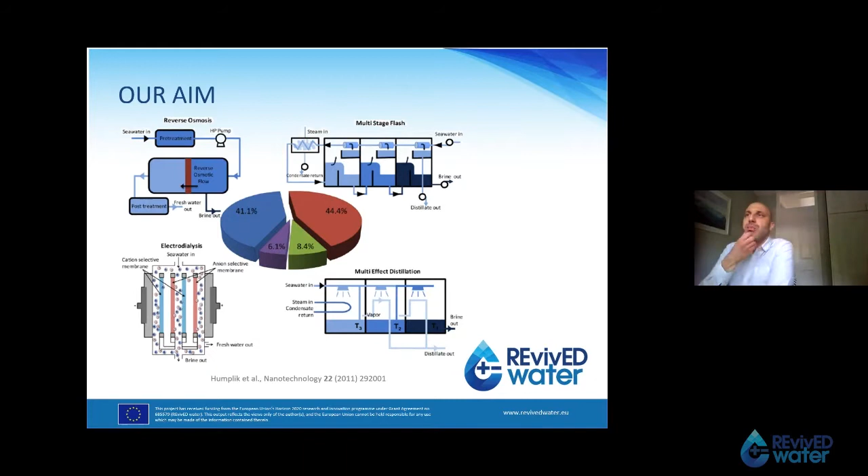On the bottom left, though, we see electrodialysis. This is still a niche technology. Membranes are used and electricity, but the main difference is that it's not water flowing through membranes, it's the salt that goes through the membranes. In principle, this can be more efficient because there is not large volumes of water having to go through membranes that can create problems in the membranes and require a lot of energy to push them through.

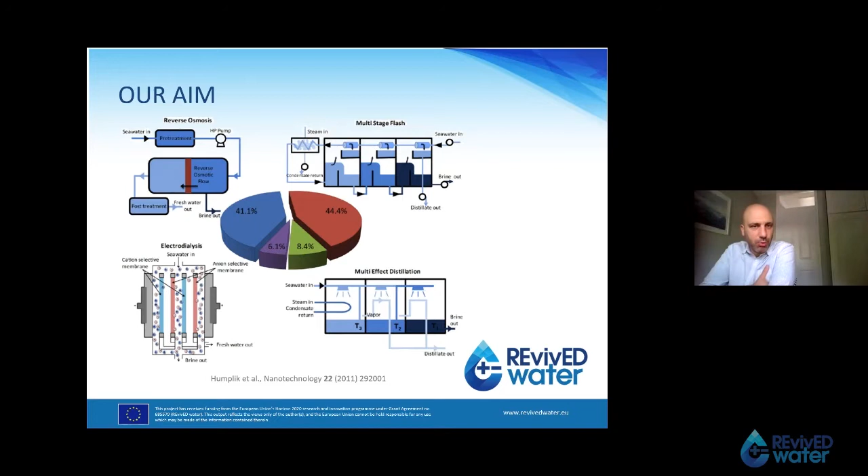So this can be, in principle, a more efficient technology, but it has not yet taken an important share of the market. So this is where our project focuses, on the technology and on the ion exchange membranes that will have the performance and the cost that will make them competitive. So the aim of the project is to develop and test innovative electrodialysis systems that showcase their benefits in mainstream desalination applications. It's a Horizon 2020 project.

It has about 10 million euro budget. It started in May 2016 and it was supposed to finish this May, but it has been extended by 3 months until July 2020 because of the coronavirus restrictions that stopped the work in the last few months. There are 10 partners from 6 countries. And you can see here the logos of the partners. As I said, the project is coordinated by Fujifilm.

There are 3 main phases in the project. In the first phase, for the first year, we've been working on the background, on knowledge and components development, prototypes for testing, design and specification of pilots. After that, we went to the phase of scaling up the main components to reach industrial scale and to start the construction of the pilot plants. And for the last year and a half, the pilot plants have been under construction and operation, and we focus on exploitation activities and market introduction plans.

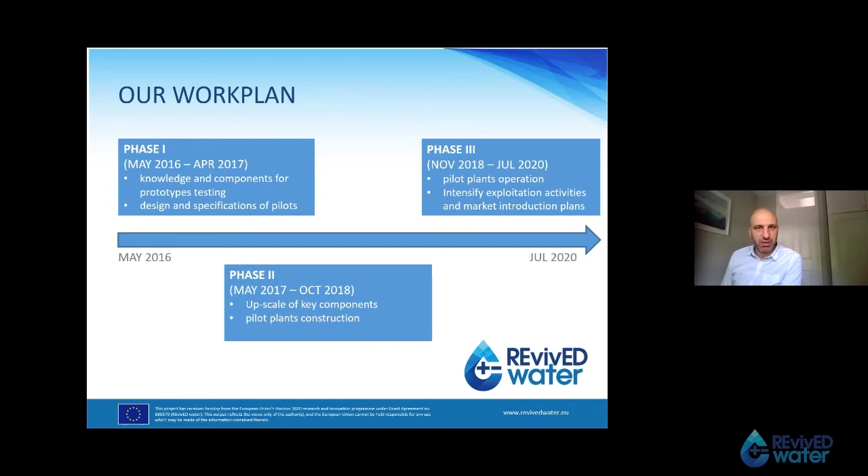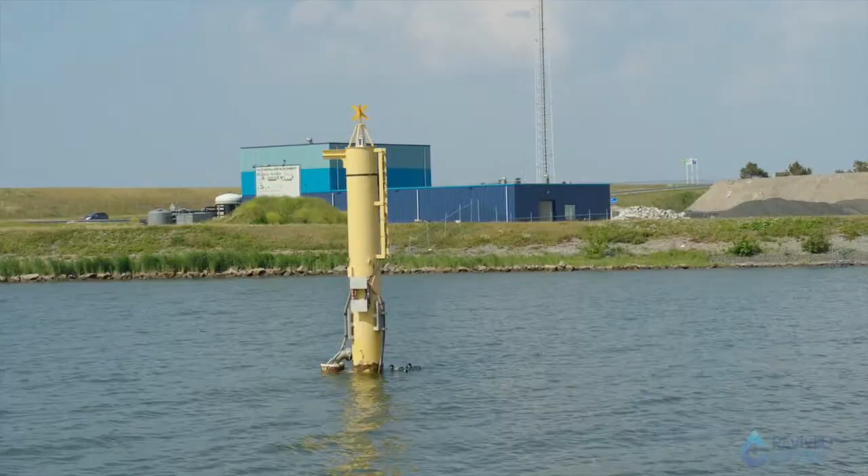Electrodialysis uses electric current to push salt ions through specially designed membranes, leaving behind drinking water. This method is energy efficient and produces less waste products than conventional processes. At REDstack's Blue Energy Test Facility, located at the iconic Afsluitdijk in the Netherlands, researchers have been testing a new multi-stage electrodialysis system. This pilot has successfully demonstrated full-scale desalination of seawater.

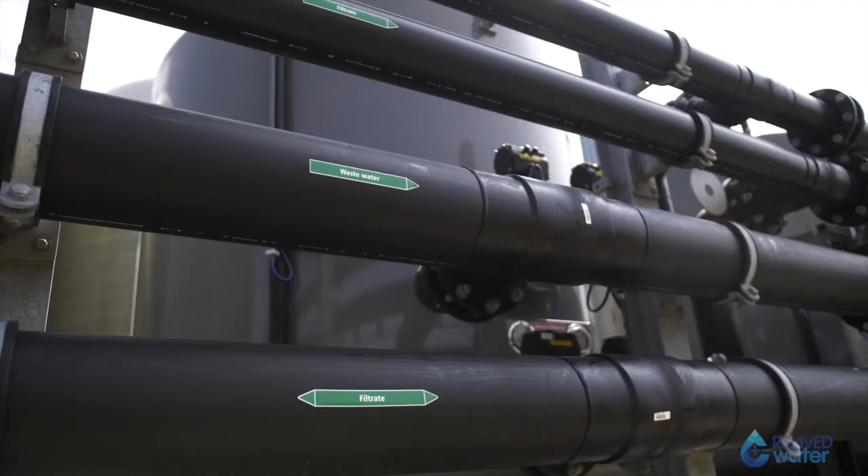The development of this energy-efficient desalination was accelerated through the knowledge and experience gained by REDstack's industrial and academic partners over the course of the REvivED Water project. We worked on this project for like 4 years, and the first 3 years we worked with artificial seawater. That was already nice when we met the target, but later on we worked with real seawater, and that was actually quite challenging, and that really felt good that we were able to desalinate the real stuff to drinking water concentrations. That was really a big achievement.

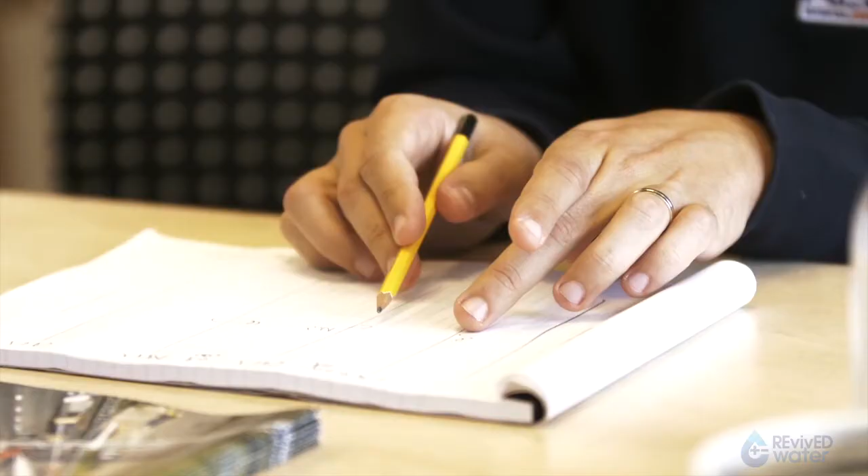Based on the results achieved in the REvivED project, a 3-step desalination process was chosen for the pilot, with a capacity of 25 cubic meters per day. Each step has been specifically designed to optimize energy efficiency and maximize desalinated water output. Behind me, you can see the pilot of REvivED, where we have a multi-stage electrodialysis desalination technology, and the great achievement is that we can do the same job more energy efficiently. Being energy efficient is better because we consume less energy, so the cost of water will be less.

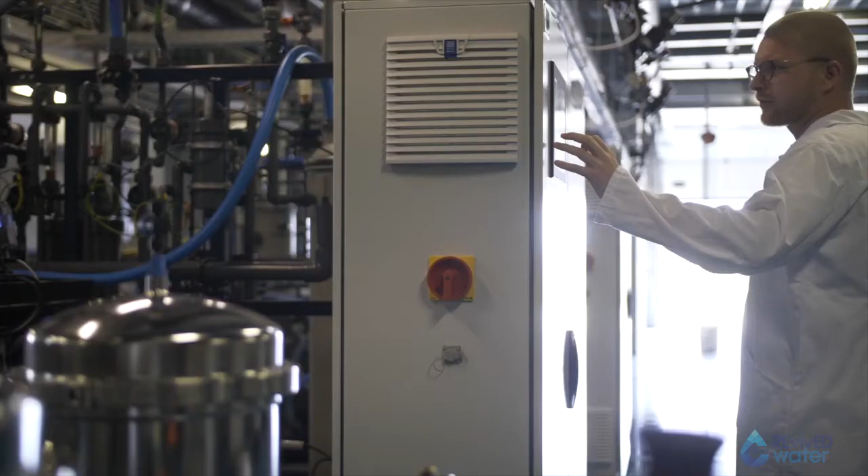We made it happen. We did a long, extensive test of like 3 weeks, where we desalinated from seawater to almost drinking water. So we're quite happy that we achieved the target, and we also met the energy consumption demands. By the knowledge of REDstack on developing and upscaling the blue energy technology, we could accelerate the technology in a sense that it is ready for commercialization.

It's quite challenging, like the world is on my shoulders. Feels good? Feels good.

This pilot at the Afsluitdijk, along with other pilots and results of the REvivED project, has brought electrodialysis one step closer towards commercialization and an energy-efficient future for desalination.

I trust this video was a nice introduction to the concept of multi-stage electrodialysis and the pilot as it is realized. Next, I would like to give the presentation mode to Gijs Doornbos. Gijs has been working as a PhD researcher for the past 4 years within the REvivED project, looking for the most optimal configuration to desalinate the water with the minimum energy consumption possible. Currently, he is employed at REDstack to continue his interesting work on electrodialysis. Gijs, the floor is yours.

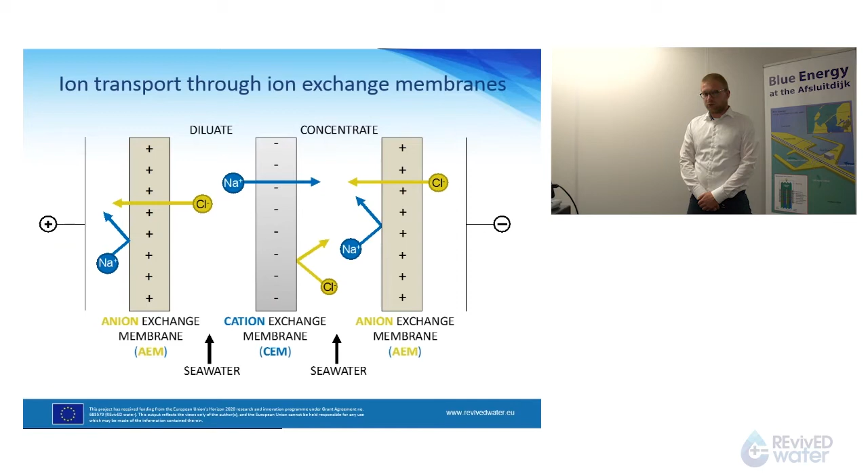In the next 3 slides, I would like to give you a short overview of the different research topics that we covered. Later during the presentation, I will address for each topic the most relevant results and the most important conclusions. First, we investigated a conventional single stage and we compared it to the desalination performance of a multistage.

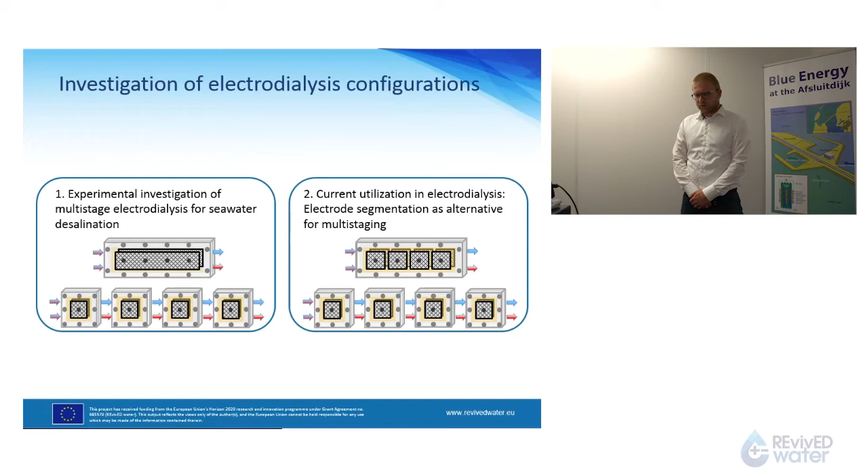And on the right side of the slide you can see that we tested a segmented electrode. So it's the same as a single stage, but the electrodes are separated in 4 different electrodes, and we compared it again to the multistage system. After this we saw that the multistage is probably the way to go.

We looked into the different amount of membranes in the multistage in each different step of the desalination process, and we also investigated the variation of membranes with different properties in different stages of the desalination process. These 2 research lines we combined, and to the right side you can see that we tested both the membrane redistribution but also the influence of the different membranes with different properties.

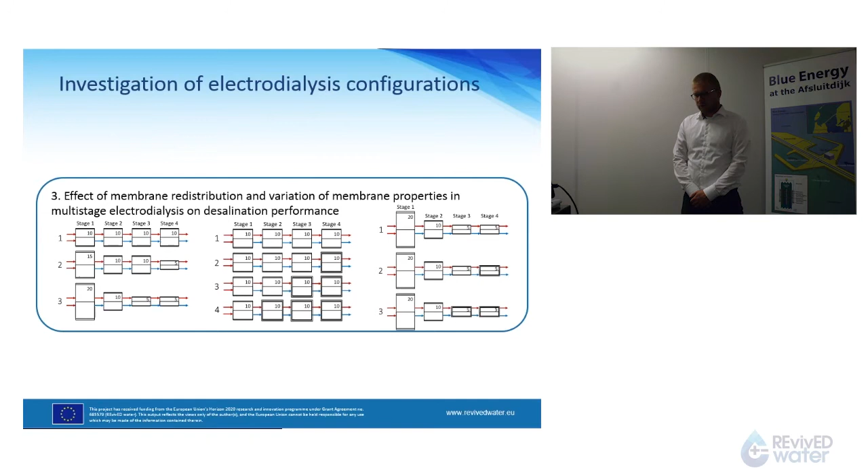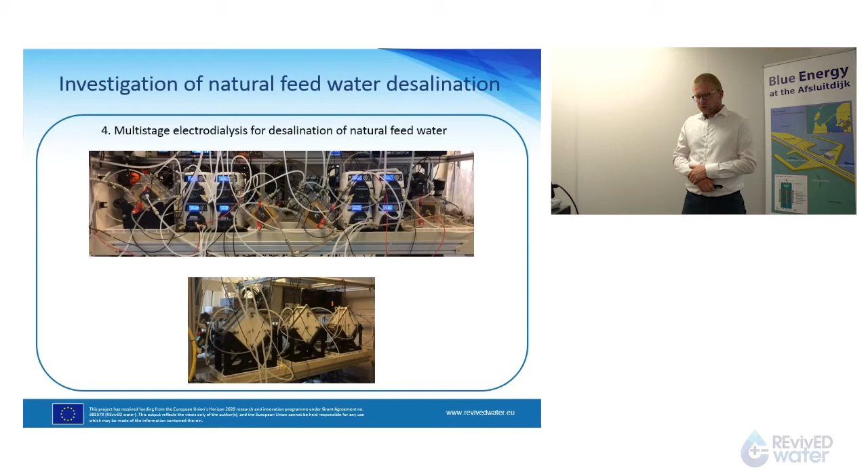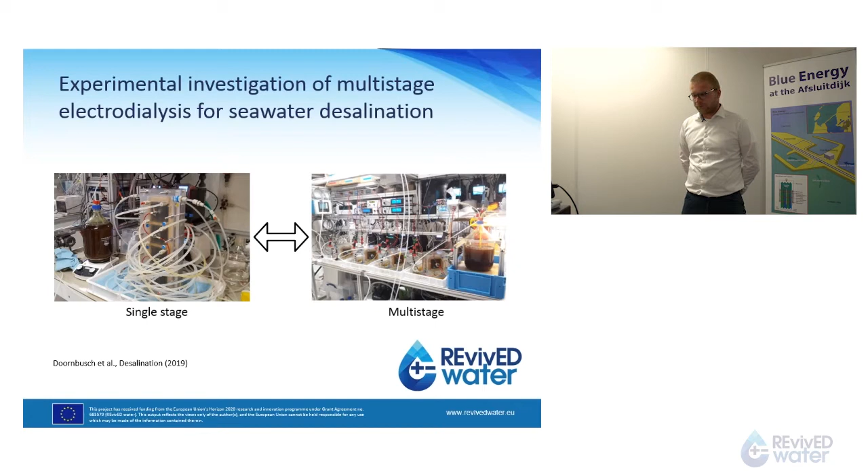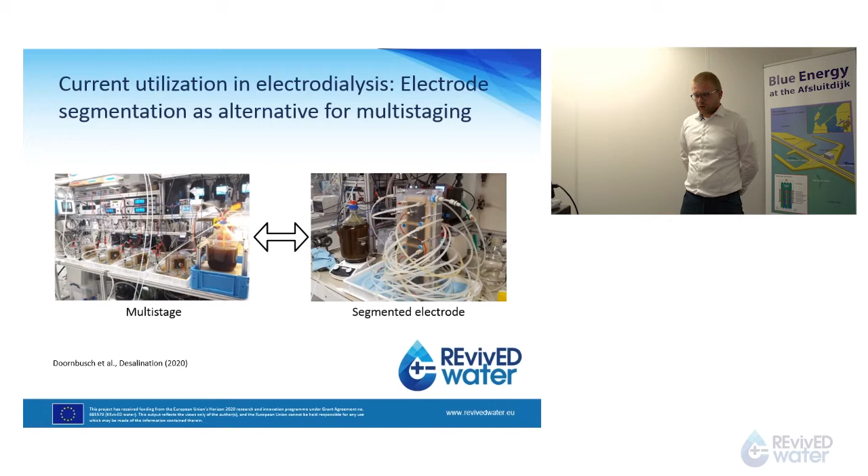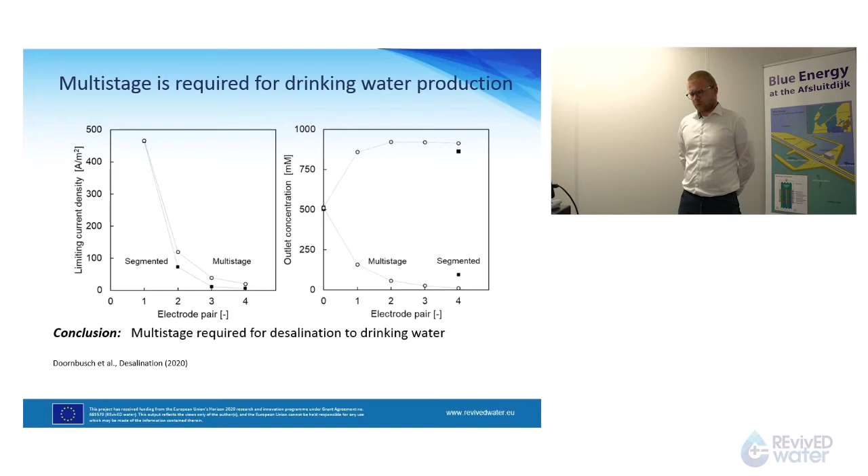Then we investigated the multistage further because we almost reached the concentration and we had a specific energy consumption, but this could be improved, and that we did by studying the effect of membrane area in each stage. So we distributed the membranes in different ways over the multistage, and we also tested different membranes with different properties in different steps of the desalination process.

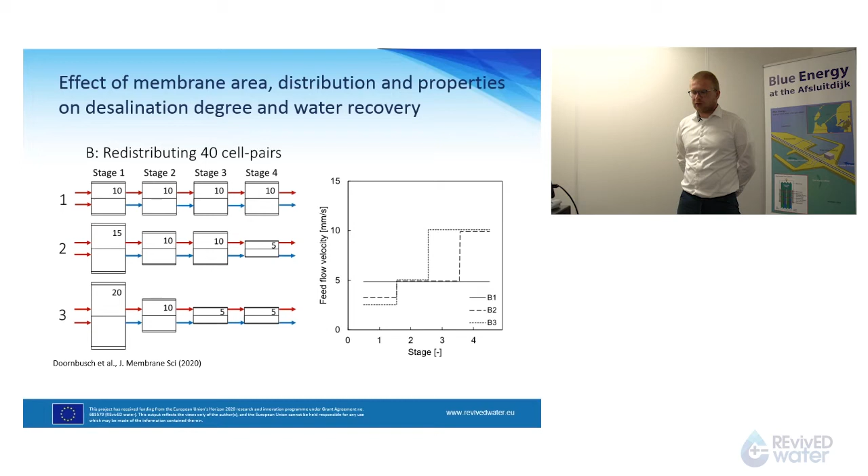In this slide you can see on the left side a schematic of a method that we used where the cell pairs are distributed differently over the stages. On the right side you see the corresponding feed flow velocities over the different stages. So basically we want to lower the residence time or the feed flow velocity in the first stage, as you can see in the right graph, and we want an increased feed flow velocity in later stages.

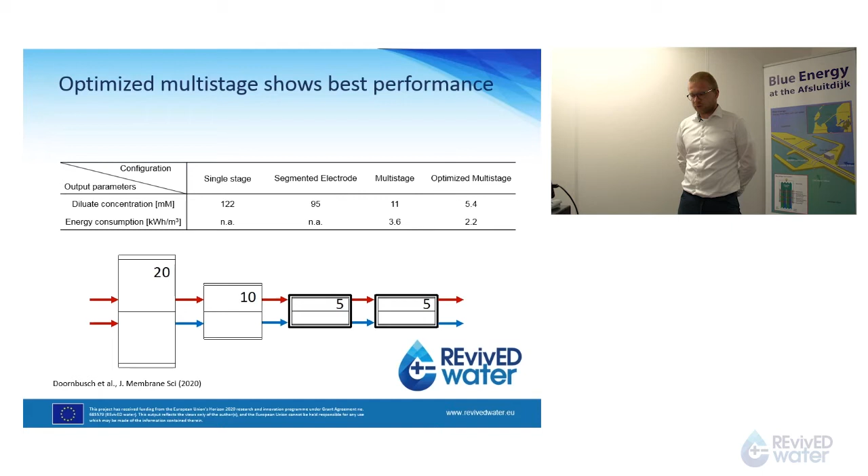And using such a scheme, reaching such a low diluate concentration and energy consumption, we were ready to continue the tests with a more complex system than just sodium chloride. So we tested these 4 stacks with different membranes to be installed as a first stage of a multi-stage system. So we went from sodium chloride to artificial seawater to natural seawater.

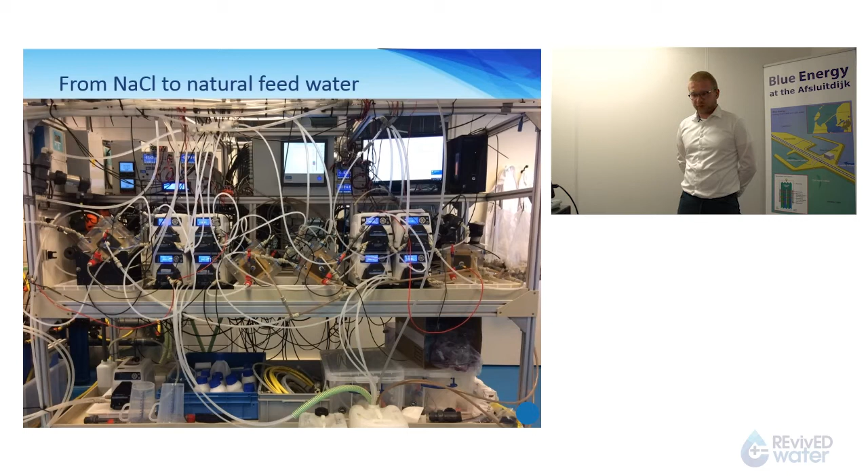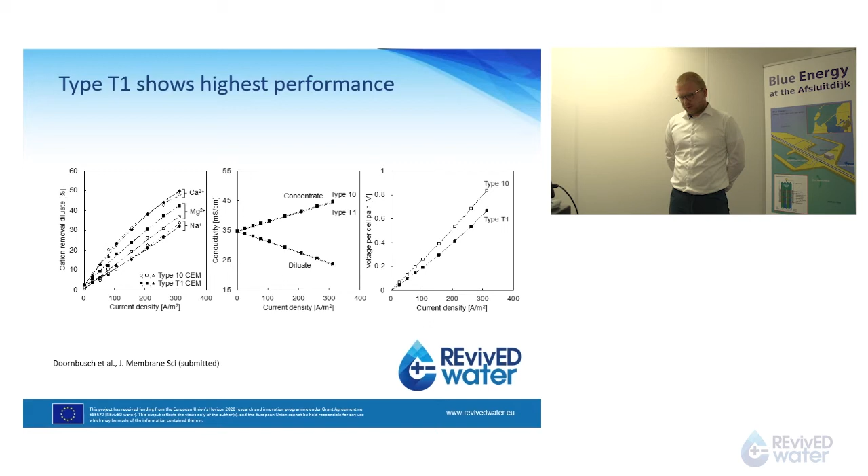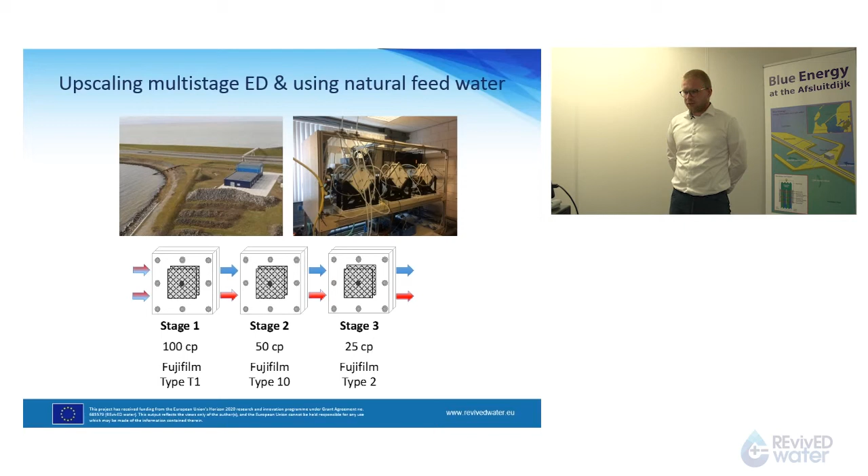In stage 2 we used normal type 10 membranes to do the bulk desalination, as we call it. And in stage 3 we installed a Fujifilm type 2, which we used before; these membranes were beneficial for lower water transport, and that also gives us a lower energy consumption because we yield more water in the end.

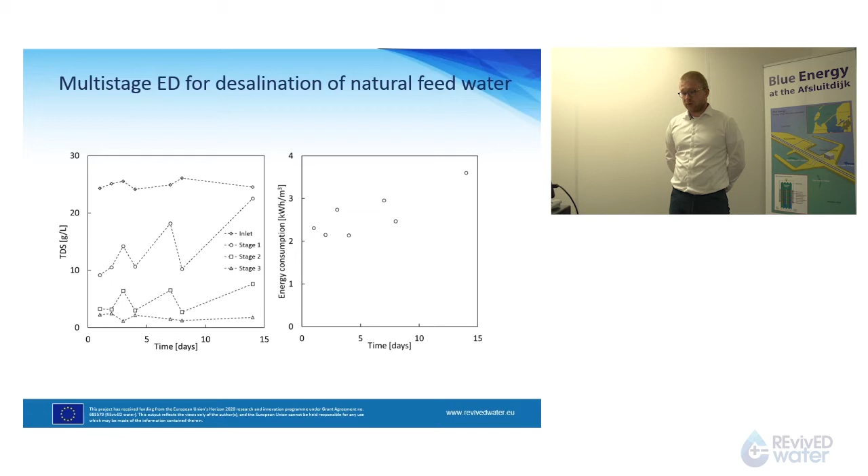But nevertheless, we reached an energy consumption over the 14 days of around 2 to 3 kilowatt-hour per cubic meter, which is already a good result. So then, to summarize the results, we compared a single stage and a multistage, and a multistage system is required to desalinate to drinking water conditions, where in a non-optimized system we saw that the energy consumption was 3.6 kilowatt-hour per cubic meter. We compared a segmented electrode stack and a multistage, and then we also saw that the multistage still is required to reach the drinking water.

If we then optimize or look further into the multistage, we see that the membrane area distribution within the multistage and the variation of membrane properties show that drinking water can be produced at an energy consumption of 2.2 kilowatt-hour per cubic meter. And for natural seawater desalination, we needed to install the multivalent permeable cation exchange membranes. And we desalinated the natural seawater of 22.9 gram per liter to 1.9 gram per liter using an energy consumption of roughly 3 kilowatt-hour per cubic meter.

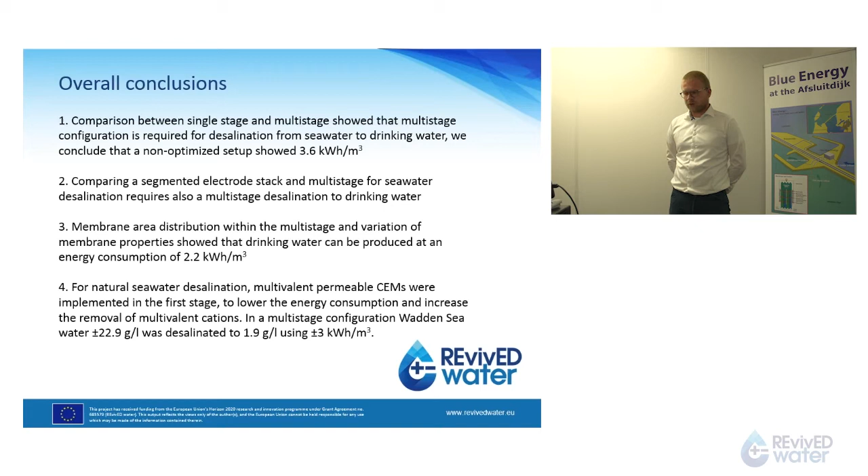The next step is this pilot system, which Jordi will explain to you later. And we hope to be able to do tests over a longer period of time.

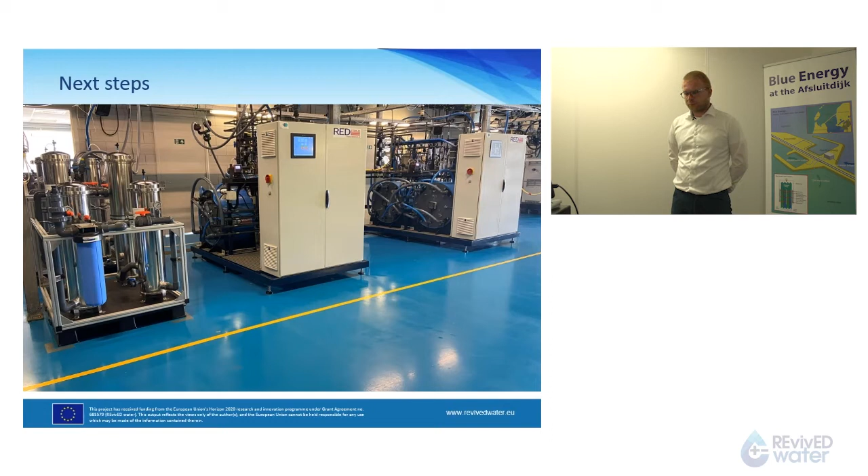Now, from the work done by Gijs, in cooperation of course with the project partners, we will move to the pilot that has been realized on the Afsluitdijk as a result of all this work. The design of this pilot and the results of this pilot will be presented by Jordi Moreno. Jordi has been involved with the project for the past 3 years. Jordi, the presentation mode is yours.

Thank you, Simon, for your introduction. And now I would like to present my presentation, and the title is Scaled-Up Multi-Stage Electrodialysis for Seawater Desalination. I'm going to present some pilot results, and I have to say that this work has been done with a bunch of colleagues like Kristan, Simon, yourself, Joryn, and Auke, who were our stack builders.

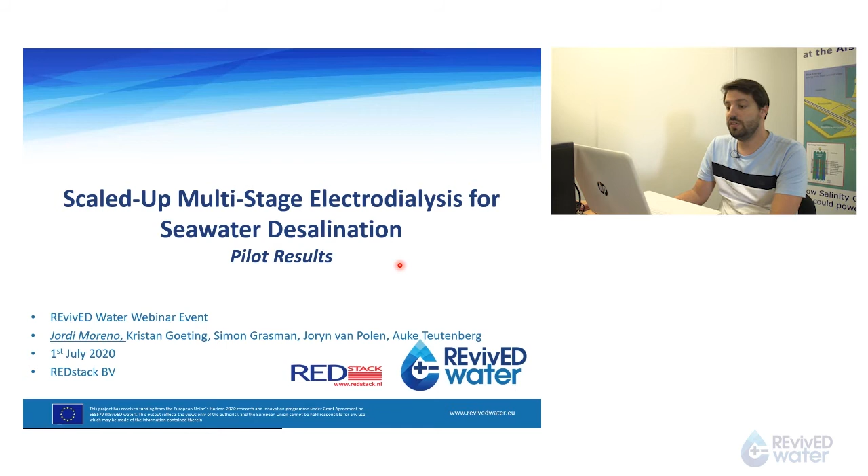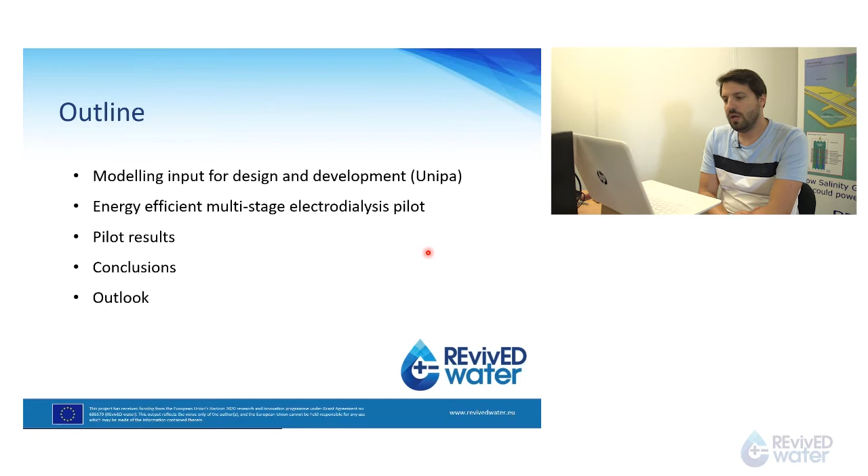And the breakdown of my presentation is going to be this one. So I'm going to present a little bit of the modeling input that we used for design and development from the University of Palermo. Also with the results of Gijs, this actually created the basis of the design of the pilot. Later on I will present the pilot, because I think it's why we are all here, to see what we designed, what the characteristics of the pilot are and why we chose those characteristics. That is also important. As well, I will present a selection of the results that we obtained during the last month, a few conclusions and a little bit of outlook.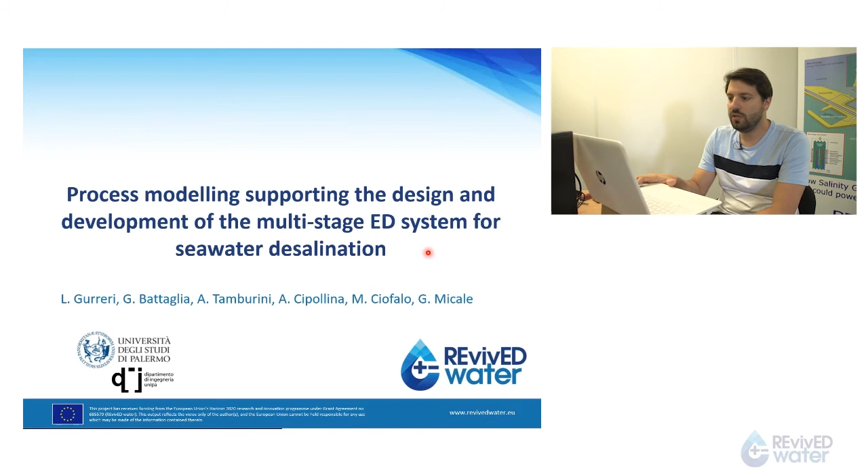So first of all, thanks to my colleagues in the University of Palermo, we received some modeling support in order to design and to develop the multi-stage ED, electrodialysis. The group of Giorgio Micale and Andrea Cipollina, and all the students they have, during these years we have been working really closely, also supporting the data we got from the laboratory from Gijs.

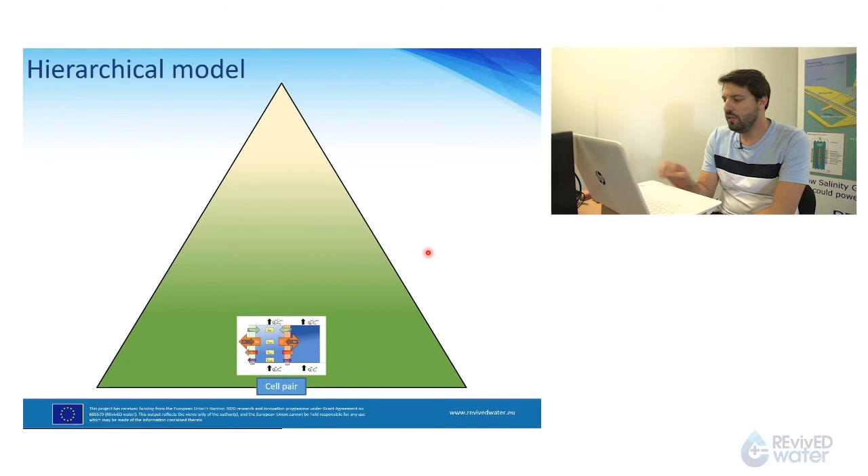So in that sense, our colleagues from Italy throughout the project developed this hierarchical model where they start with the cell pair modeling, and this includes the transport phenomena and the electrical circuit. They scale up into stack parameters. So they could include more variables like flow, a little bit of hydrodynamics, and also performance like ionic shortcut currents. And with all this knowledge, we could really model a plant, or simulate how the future plant is going to be and what was the most interesting configuration for our plant. They had a lot of publications during these years, and I think that was really interesting and really helpful.

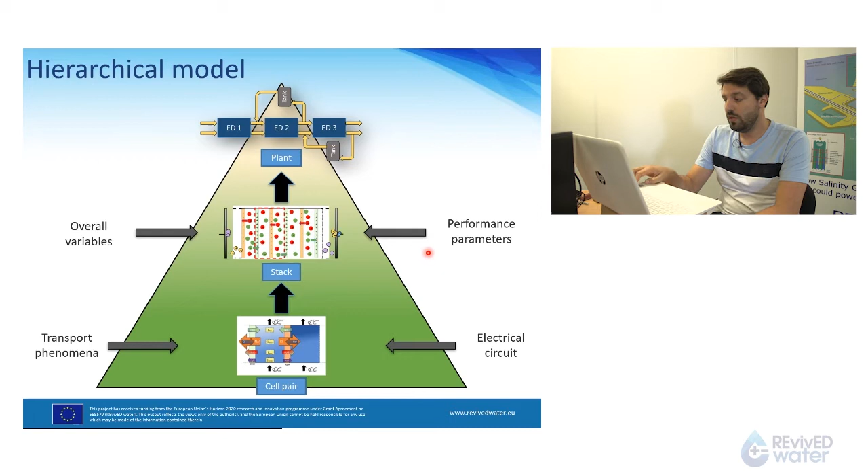So with the model they developed at pilot level, we tried several things. The first one was to model the best membrane distribution in order to get better energy consumption. So we assumed some conditions, like using the spacers we use already on the pilot, inlet salinity at defined temperature, and we targeted 25 cubic meters per day of product. So they made two scenarios. One scenario where all the stages are 150 cell pairs, and another scenario where the membrane distribution is a little bit different. So they put more membrane at the beginning than at the end. So a little bit like Gijs explained, we see that we can speed up the flows.

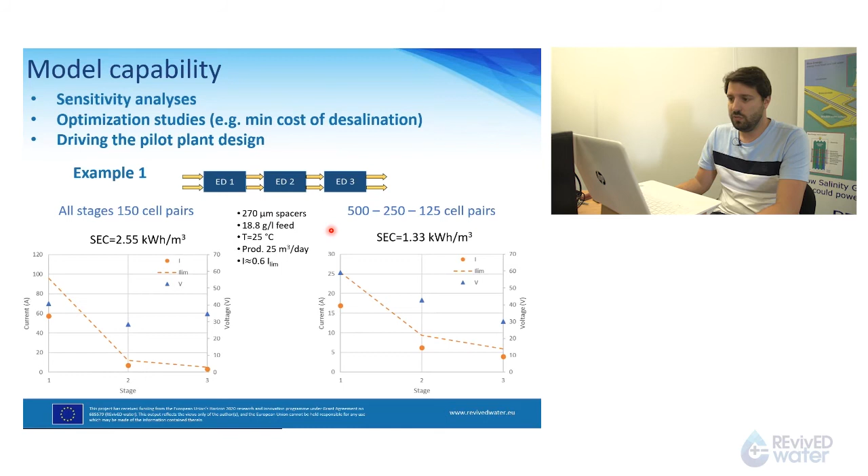And actually, if you look at the specific consumption, it is way more favorable to distribute the membranes along the path and also speed up the flow a little bit, because then it overcomes one of the limitations of electrodialysis. That was really promising, and we chose a three-stage configuration with a membrane distribution, but we also wanted to look a little bit more at what the membrane properties would be when we make the plant, and what the impact of those would be.

Also in this case, they were able to model the cross-flow configuration. The previous one was a conventional stack, so a co-flow configuration, and now it's cross-flow, like our stacks. They decreased the temperature a little bit, and they also adjusted the influent salinity and the production. So here we can see that when they simulated the plant, they got a specific energy consumption of more or less 1.7 kilowatt-hours per cubic meter. We will see later that we are not far away from this number. So the modeling was really helpful.

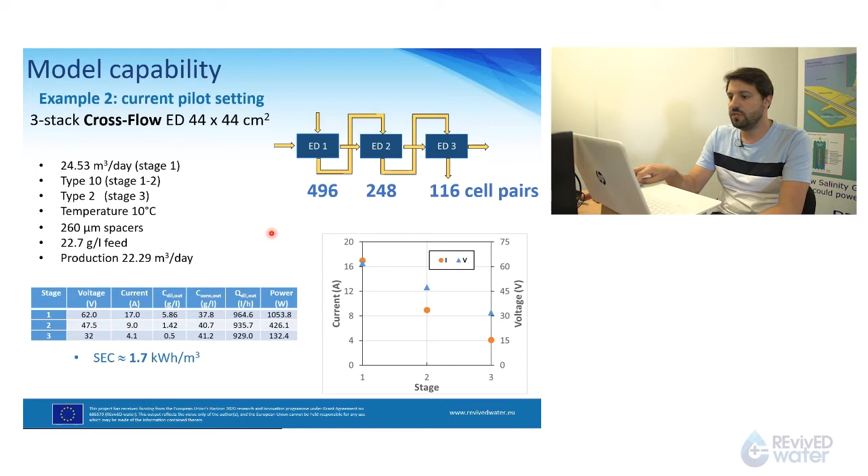And this was a validated model, because they used the data from Gijs in the laboratory, and also from Maria Georgia and from Antonino from the laboratory. So it was really helpful to design the stack. So thank you very much to the colleagues of the University of Palermo, because they were really helpful in this stage of the project.

So now I go a little bit into the pilot, and I already said that it's a three-stage electrodialysis system where we use an asymmetrical membrane distribution, but we also use different membrane properties. By that I mean that the first stack is bigger than the last stack. So the water increases in velocity every time, and also thanks to Fujifilm, we use two different membranes, type 10 and type 2. We put type 2 at the end, and it allows us to control the water transport. So we can avoid some losses when the gradient is higher.

We also designed a pilot that has multiple operational configurations. It allows us to test different configurations, and I will explain them later, because you will also see the impact of each configuration. We did this together with Pure Water Group, and they had quite a lot of knowledge and helped us develop this pilot, and the conversations we had with them were really interesting. We could also integrate the new stack design. You can see it here. Normally we work with more prototype kinds of stacks, and now this is really close to a product. So we also developed our engineering skills through this project.

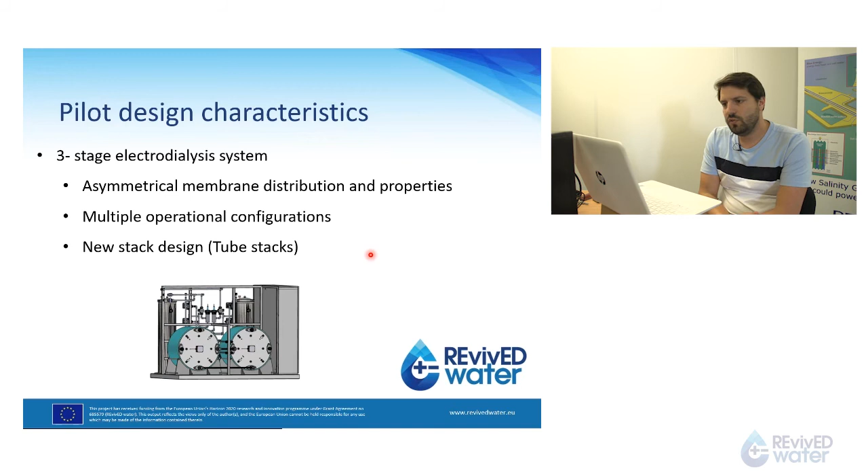As well, since we are using natural feed waters, we needed to include a prefiltration skid, and we learned from our pilot at Afsluitdijk, because we had a lot of experience there, but also from the pilot we have in Burriana, in another work package of this project. We saw which problems they had and how they solved them, took the best lessons from that experience, and implemented them in this pilot. So this transfer of knowledge between partners was really beneficial, because it helped us a lot to define the minimum design requirements for our pilot.

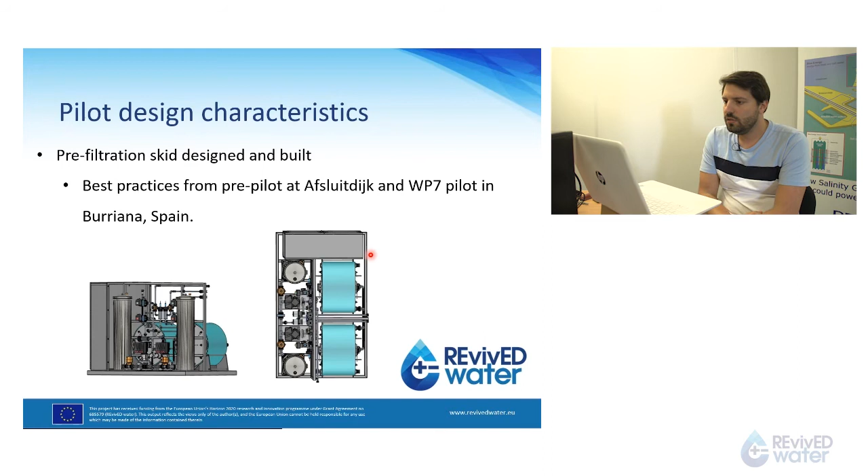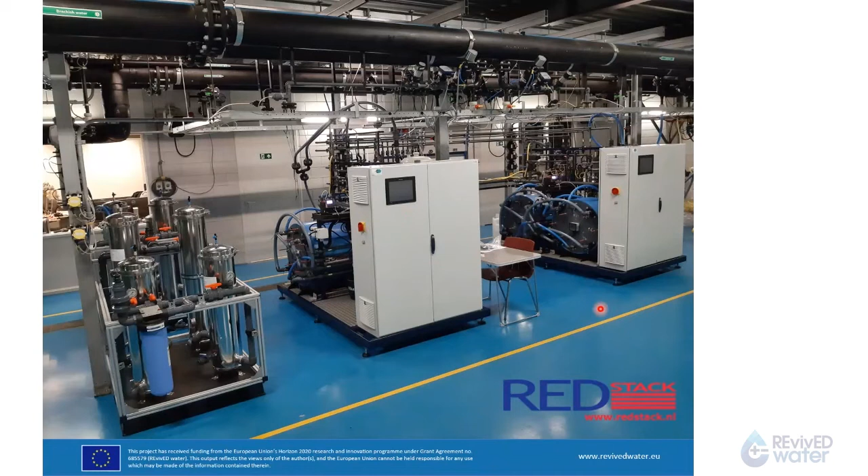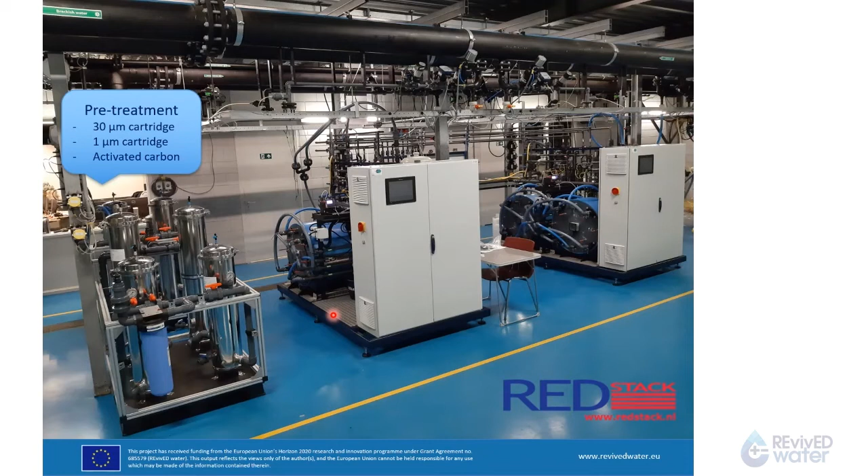So here it is. This is the pilot within the Afsluitdijk installation, and we chose two skids with 3 stages. This is what I call a skid, this is another skid, and here you can see the 3 stacks. If we look closer, this is the pre-treatment. The waters at Afsluitdijk are natural feed waters, and we use rapid sand filtration, a dual media of anthracite and sand layers. After that, we include a 30 micron cartridge down to a 1 micron cartridge, and later on active carbon to remove more organic compounds from the water, like humic acids.

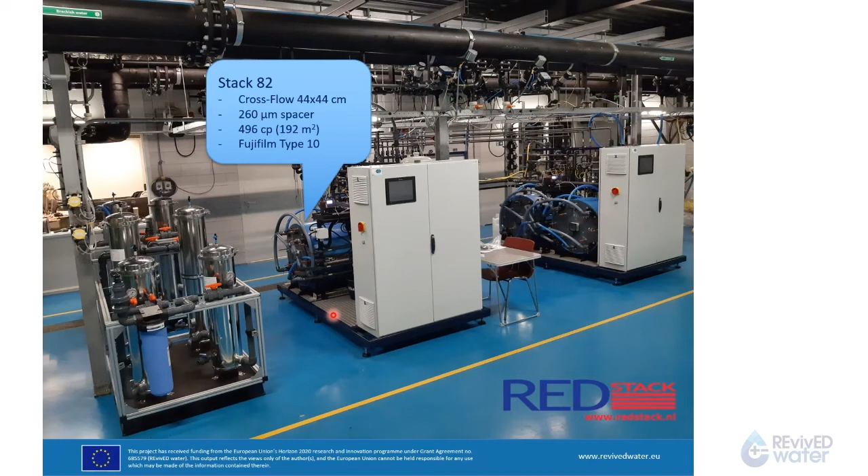Here we have the first stack. I call it stack 82. This was the design number, but for us this stack is stage number 1. It's equipped with Fujifilm type 10 membranes. We have 192 of active membrane area with 496 cell pairs, and the spacers from Deukum are 260 micron thick. The configuration, as I said, is cross-flow. Now we go to the second stage, and there we have half of the cell pairs, which means the water will flow twice as fast, with the same type of membrane, Fujifilm type 10, and the same spacer configuration.

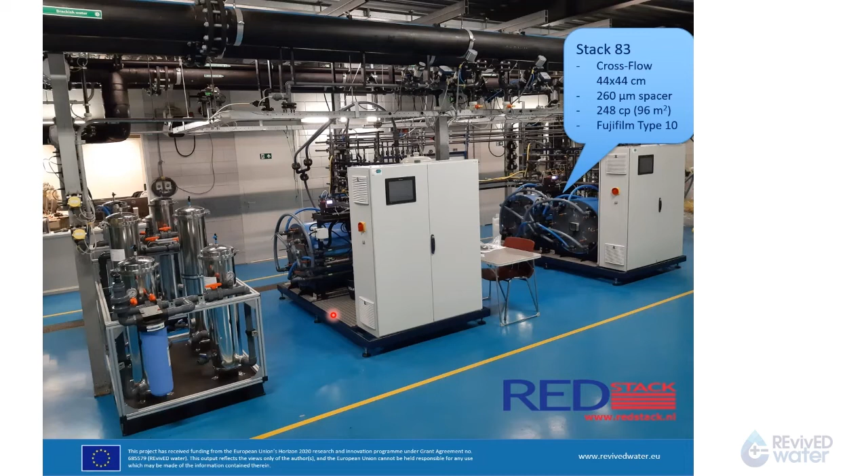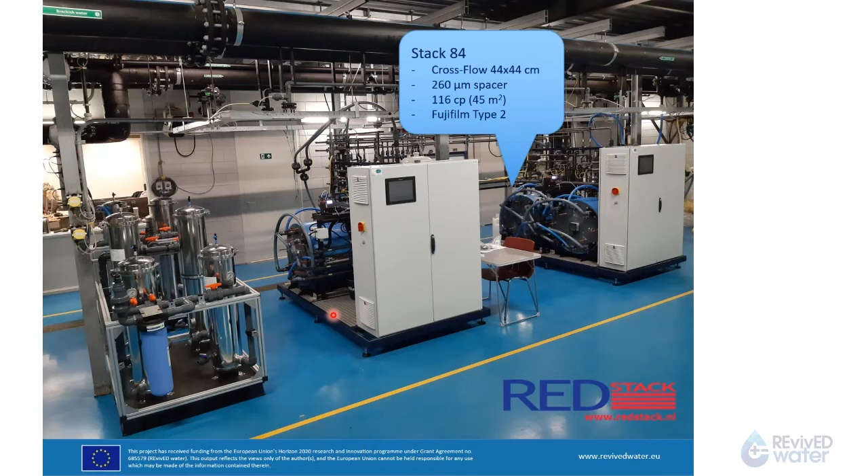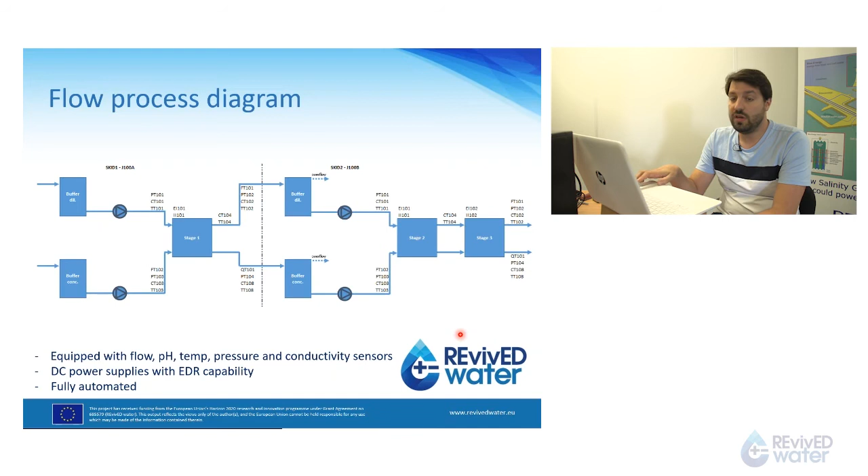So now I'm going to explain a little bit a selection of the results we got during the operation of this pilot. First of all, I will present 2 series of experiments with artificial seawater, and later on 2 series of experiments with natural feed waters, but also longer time.

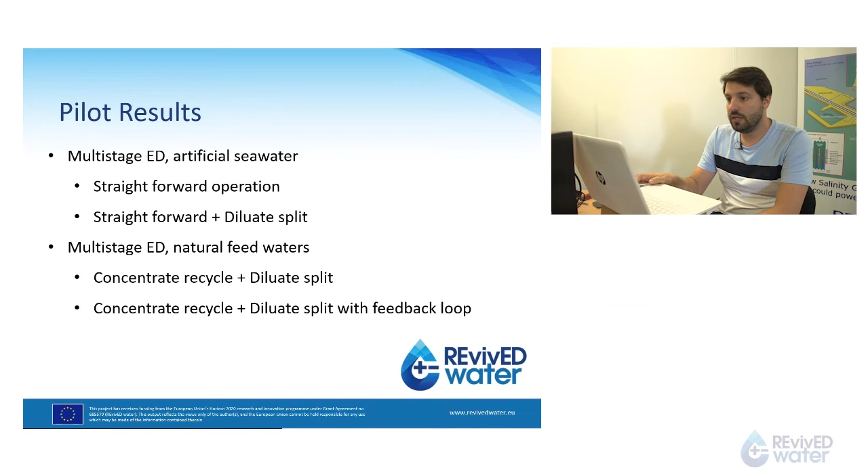And the first one I want to explain is when we're using artificial seawater, and artificial seawater is nothing else than sodium chloride in a closed loop. So we recirculated the water during the experiment just to characterize what was the LCD point for each stage and also what was the energy consumption at that point. So it's a little bit more controlled situation, not really jumping into the difficult natural seawater.

For a straightforward, what we call it is when we feed the water and it goes through the 3 stages, and 50% of the feed water is product and 50% of the feed water is concentrate. So actually this is the easiest way of operating a multi-stage pilot.

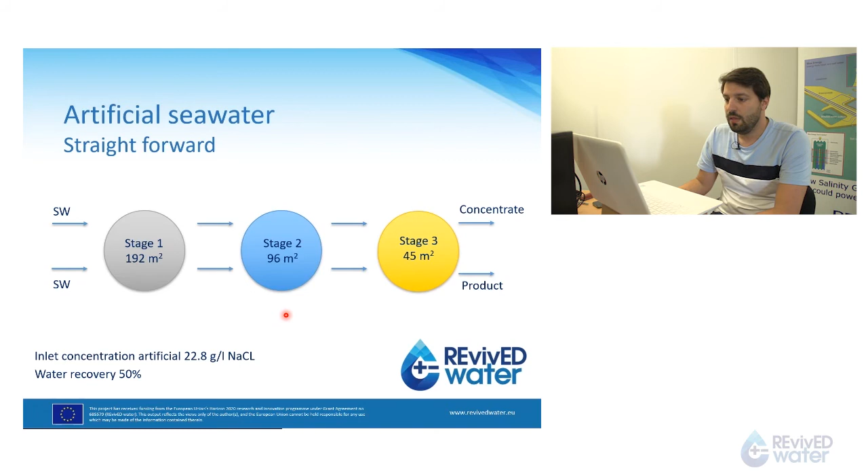But it has good things and bad things, and one of the good things is that you have a higher recovery, but on the other side, if you want to desalinate faster to avoid the concentration gradient, you need to really speed up the flows, and at some point that is not possible.

And here at the beginning we tested 3 different flows. The first one is 1,000 liters per hour, so that results in 24 cubics per day. The second one, we speed it up and it is 1.5 cubics per hour, so that is about 36 cubics per day. And the other one is already 2 cubics per hour, so it's about 48 cubics per day.

And what we can see here is the absolute rejection, so on the blue ones we see the first stage for each velocity. We see that it does most of the job, so actually it cuts by almost half the concentration. That means that if you start at 22.8 grams, you already end up at 11 grams, more or less, a little bit more because it's about 60. The second stage removed 24%, and the last stage 12%.

You can see that as soon as you speed up a little bit the velocity, the last stage is able to remove less and less, but there is a little bit of redistribution between the stacks. If you look at the energy consumption, of course, as soon as you increase the velocity, it also increases the energy consumption. And this is really clear when we use a really high flow rate.

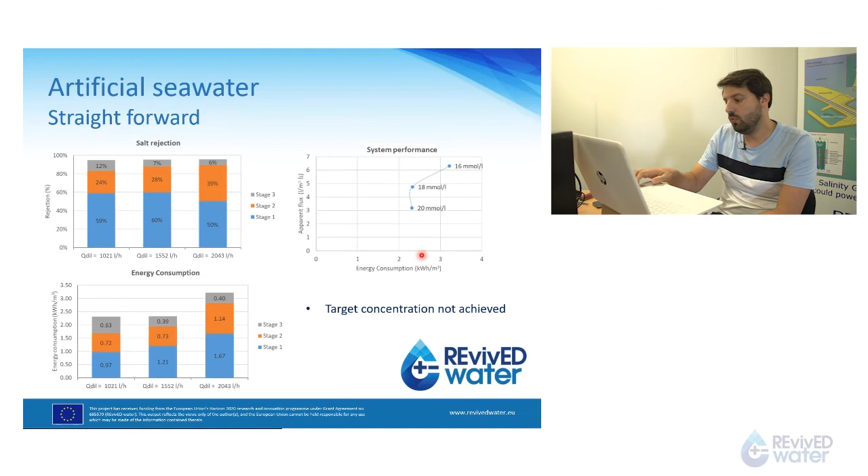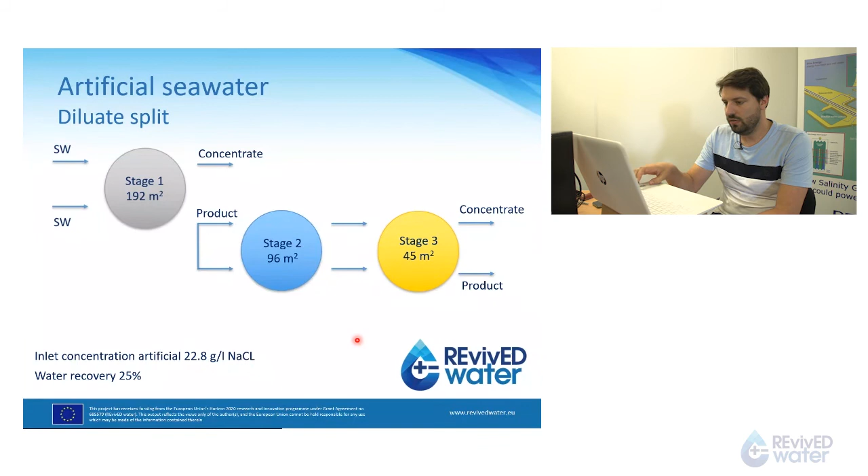But as you can see already, product is only 25% of the feed. And what it does is that your LMH goes down. So we need more membrane to do the same job. Well, there's a little bit of background, but if we look at the data, we see that now instead of using 1,000, 1,500 and 2,000, now we need to use a little bit lower velocities, because this is also the first stage. We need to split the diluate, so there is not enough water available

in the stack. So the first velocity is 500 liters per hour. That is about 12 cubics per day. The second one is 750 liters per hour, about 18 cubics per day, and 1,000 is about 24, so actually the target of our pilot. So here we have the rejection again against the velocity, but for the different stages. And you can see that the first one is doing most of the job. Actually, it's the same performance as the previous configuration.

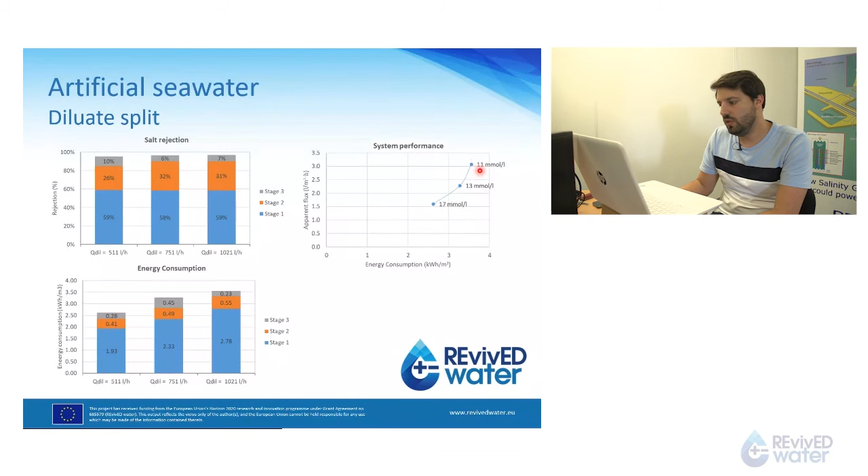But the second stage is doing a bit more, and the last stage is also doing a little bit more. Since we don't have water transport, the first stage is the one taking most of the energy, but the second stage and the third stage are not consuming that much. And that is really interesting because it allows us to more or less reach the target we want, of course at lower LMH because we are splitting the water and we have less water recovery, but we almost reach the target we wanted. So this is in the right direction.

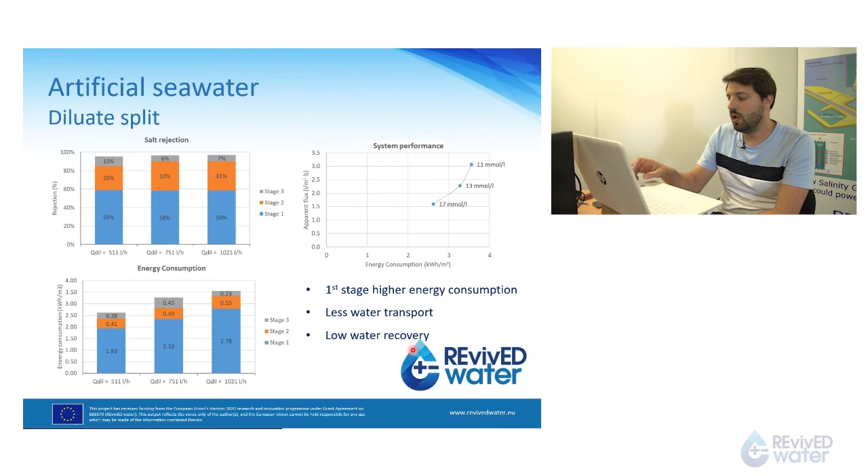And here you can see what I said, the first stage has a higher energy consumption. Of course, we have less water transport, but at the expense of low water recovery. But then we decided to make another twist on the configuration because we could try different operational modes. And what we did now is the concentrate recycle.

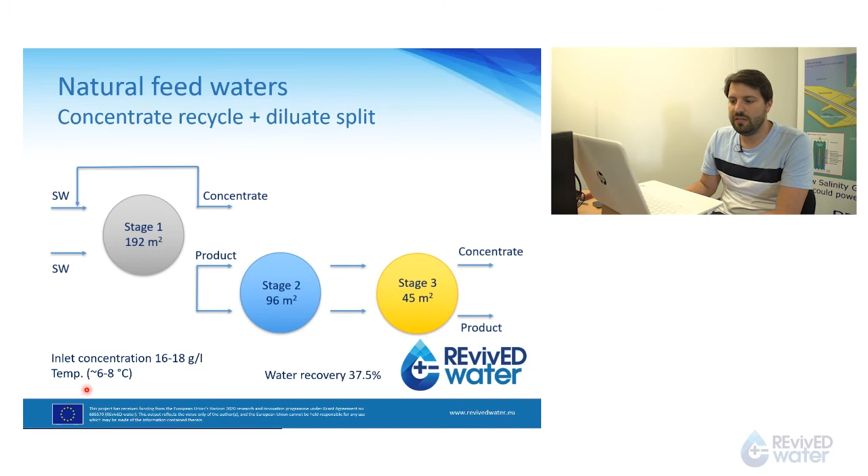So in order to increase the water recovery from 25 to 37, we recirculate the concentrate that we were discarding. So we are creating a higher gradient on the first stage, but that allows us to gain more water recovery. For this experiment, since we are concentrating a little bit on the first stage, we decided to do it with natural feed waters. And I have to say that at that moment at the Afsluitdijk, this data is, if I'm not mistaken, from February. So that means about 16-18 grams per liter in the inlet and temperatures about 6 and 8 degrees on the inlet.

Here we can already see that the graphs are changing. On the first stage we can do a little bit less than before, but the second stage is picking up, so it does more desalination, and the last stage is similar to the other experiments. And this is also because the first DC power supply was a little bit limited in voltage. The water was so cold that the resistance of the water was really high, and we could not really desalinate everything we wanted on the first stage. So that's why it came to the second stage. You can see the energy consumption is the same: as soon as we speed up the waters, we also increase the energy consumption.

But especially on this one, it's quite low already. We are a little bit below 2 kilowatts, and we are really close. Well, actually we hit the target. As you can see here, we have 10 millimolar at below 2 kilowatts. And then later on also at 18 cubics per day, we could

reach the target concentration. But when we speed up the waters, due to the lack of voltage on the first stage, we could not desalinate enough; we have only 32% desalination, and this used to be 60% desalination. We could not really reach the target. Well, as you can see, we can keep the same LMH, the apparent flux, and we can decrease a little bit the energy consumption, but we are not really hitting the target that we want.

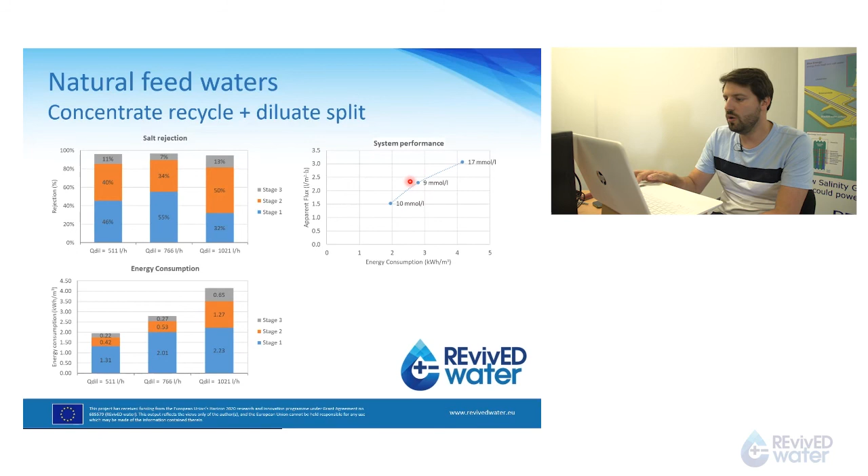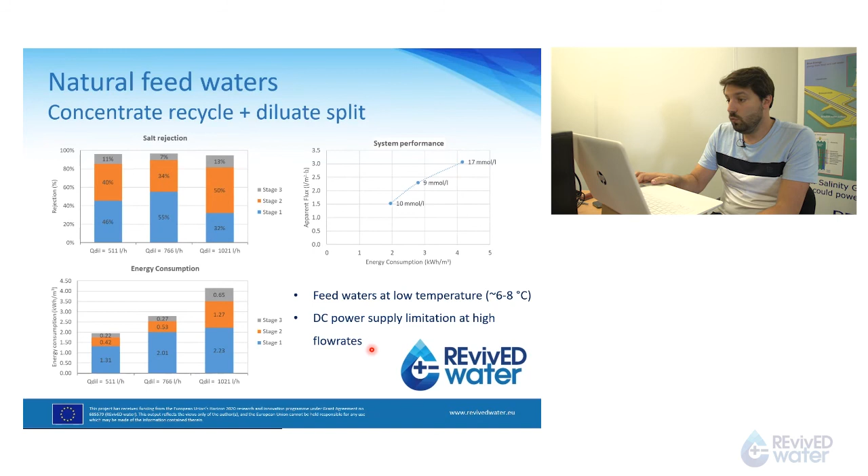So remember that here the temperatures are low, but also the DC power supplies were limiting a little bit at high rates. This was really interesting. So we decided to make another twist, because we were still a little bit low in water recovery. We tried to increase the water recovery, and what we did is we used the final concentrate and fed it back to the inlet.

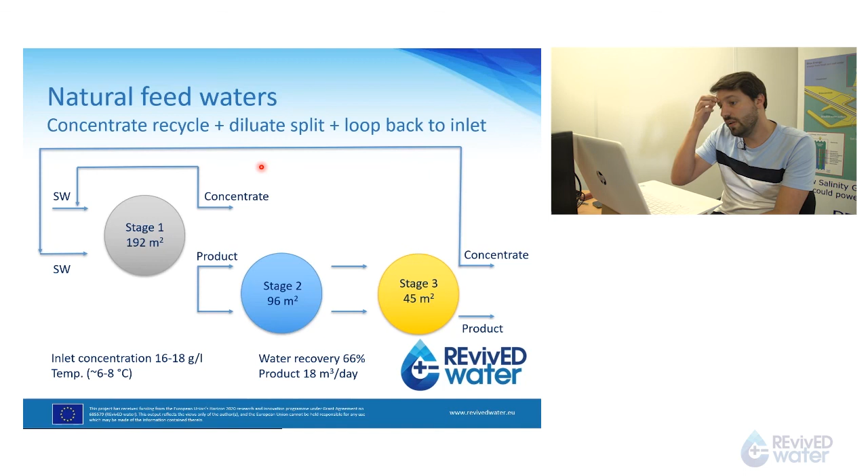So this was really promising, so we wanted to speed up a little bit more. And speed up means to create more product. So we increased from 500 liters per hour to 750 liters per hour. This equals around 18 cubics per day, with the same water recovery. We kept the same concentration, and we decided to make it a little bit longer. So in this experiment, we were looking at data for about 7 hours.

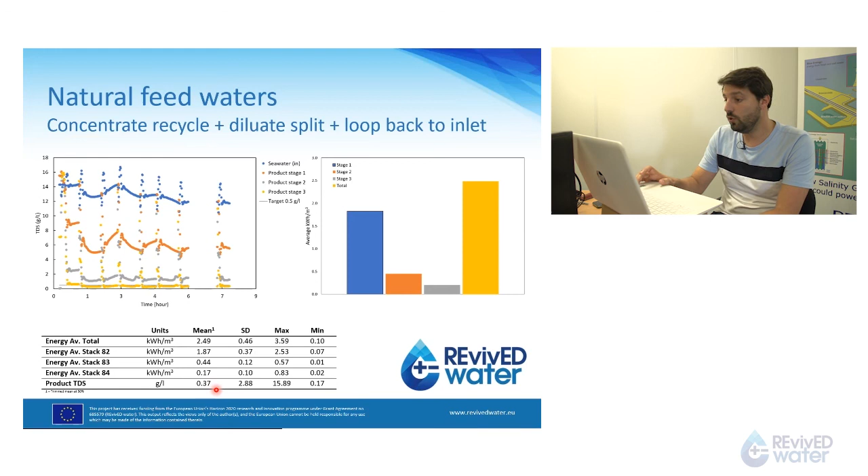So really good results. And now, to close up, I will draw some conclusions of the experiments and also of the whole project a little bit on this work package.

And what I can say is that the lab work done by Hayes and other PhD students from University of Palermo and also University of Ghent, and the validated model that they developed, was really useful to design the pilot and also to size the stacks. That was really important, because then we needed to test. We don't need to buy or build 3 pilots. With only one, we could already go really into the most optimal configuration, thanks to the modeling work.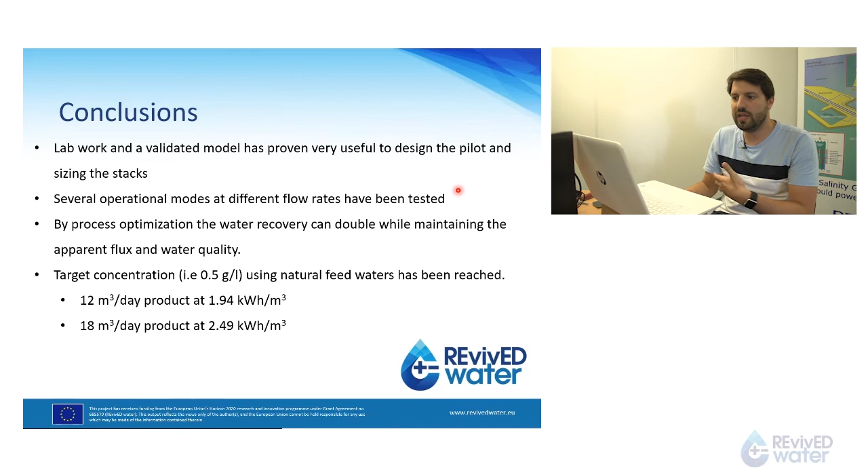Also, we could test several operational modes at different flow rates, and that actually gives us a lot of insight on what is the best configuration if we wanted, in the future, to build up a full-scale facility, because it depends on the water quality, but also looking at different properties of the membranes or distribution of the membranes, and also the operational modes. It gives us a little bit more freedom to design the best flow diagram for each application.

Later on, we saw that by process optimization, the water recovery could be doubled while maintaining the apparent flux and water quality. So actually that means that with a little bit of creativity and reusing the flows, we could keep the LMH pretty good. And actually what it does is that we can increase the water recovery without needing more energy, more membrane area. So that was also really good.

We also have here some results that I summarized in the conclusions. We reach the target concentration, that is 0.5 grams per liter, using natural feed waters. And by producing 12 cubic meters a day, we could produce this product at almost 2 kilowatt-hours per cubic meter of product. And when we increase the production a little bit more to 18 cubic meters per day, we reach 2.5 kilowatt-hours per cubic meter.

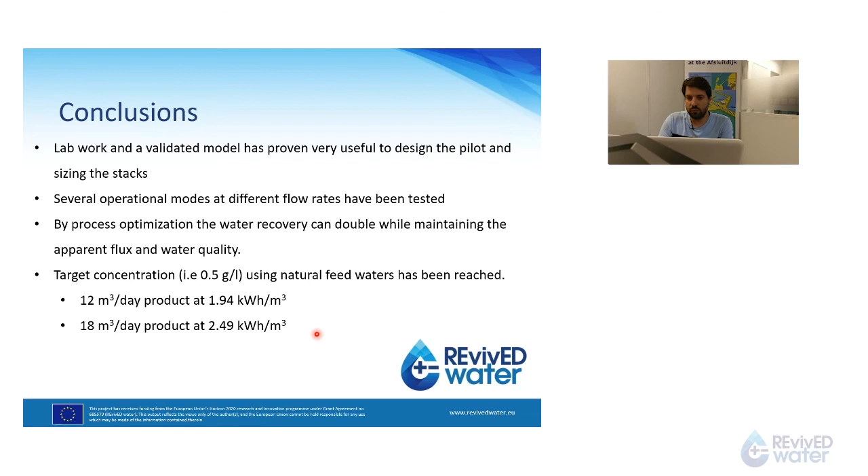Of course, we still have some time in the project to do things, and what we wanted to test is that we are going to add a 4th stack in the system. We saw from the experiment of Hayes that maybe 4 stages was the optimal, because he saw that he had really good results. So we also want to test that on the big pilot.

So we add a new stack, but without adding new membranes. What we are going to do is take some membranes from the first stage and place them at the end. So we are going to redistribute the membranes in order to get better results and a bit more stable at higher recovery. So maybe now with a 4-stack, the straightforward configuration will be enough to get the target concentration, and in that sense maybe we can also increase the water production.

And of course we want to test at different temperatures and different seawater salinities, and that is quite relevant because we were testing at low salinities, like North Sea water salinities, but the temperatures were also really low. And the temperature has a high impact on the energy consumption.

So now, we saw that electrodialysis is interesting in the Middle East countries, and they have higher temperatures, but also higher salinities. So we want to study more what our pilot is able to do at those concentrations and temperatures, because then it will help us a lot for the business case and also to find applications in the future for this technology.